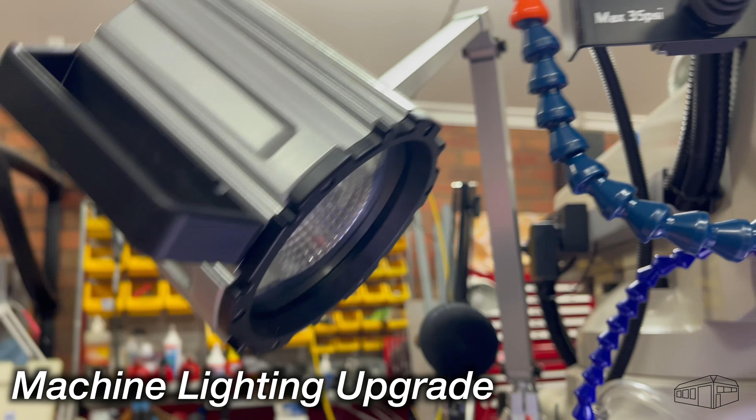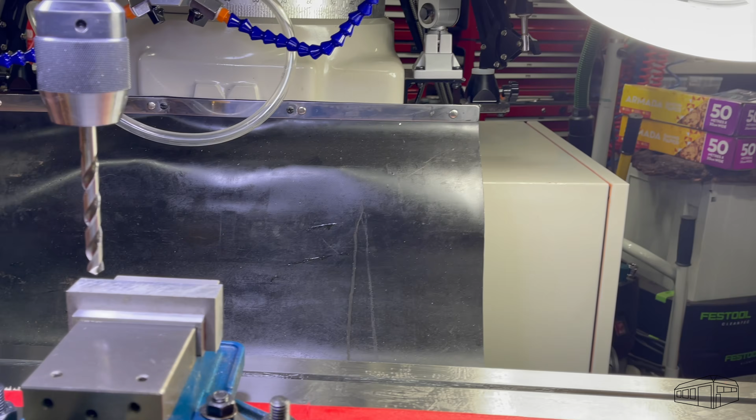My milling machine has a machine light fitted as standard. It's an 11 watt LED and it works very well. I supplemented this with a second light on the other side of the column, and it's also useful as a magnifier for fine work. However, they both create a problem with shadows and flares which restrict the camera placement and angles, so I decided to make an additional light that overcomes these problems. I'll make a ring light that will be mounted around the quill and provide light vertically around the cutter.

I have several requirements for this build. It must not be physically attached to the mill. I don't want to use nuts and bolts to attach it. It must be independent of the mill electrical system. It will be 12 volts, so it won't work with the mill systems anyway. It must be easily removed and replaced for cleaning, or if I don't want to have it fitted for a particular machining setup. It must not be affected by oil or coolant.

It needs to look like it belongs and is part of the machine and not just an add-on. I don't want it to shine light on my eyes during use, so the light must reflect downwards and not sideways. And it must be effective and just work. As a starting point, I had a look on YouTube to see what others have created. While there are some interesting builds, I didn't find any designs I really wanted to use, so I'll make my own. The ring will be 3D printed and I'll use PETG Pro filament.

The parts I will need for this build are an LED light strip in cool white, which will be about 6000K in colour, an inline switch to turn it on and off, a 12 volt power supply of around 2.5 or 3 amps, a power board, some 8mm magnets, and of course some resin.

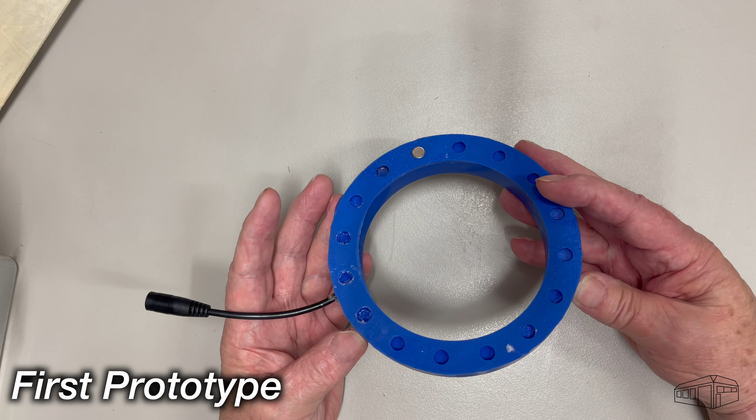I made a prototype to see how the components would fit together, but more to see how the resin would work with the LED strip. I made 2 wraps of strip and that came together alright, but the degree of brightness was not what I was hoping for. However, it does a good job of illuminating itself. It needs to have angled surfaces to reflect the light downwards to the workpiece. A quick sketch and I have an idea to have 2 rows of strip mounted vertically, with each shining against an angled surface to provide downwards illumination.

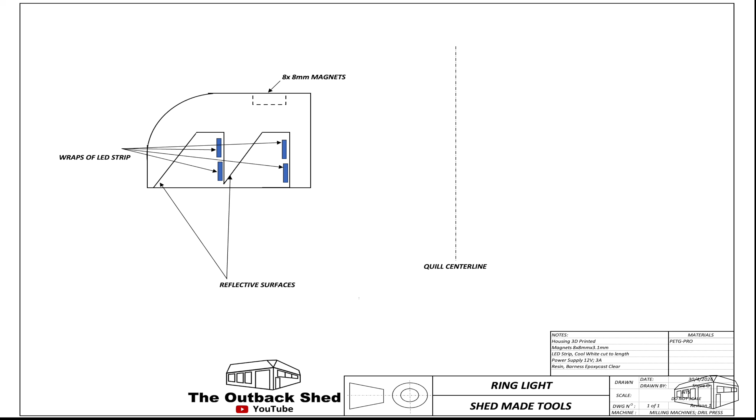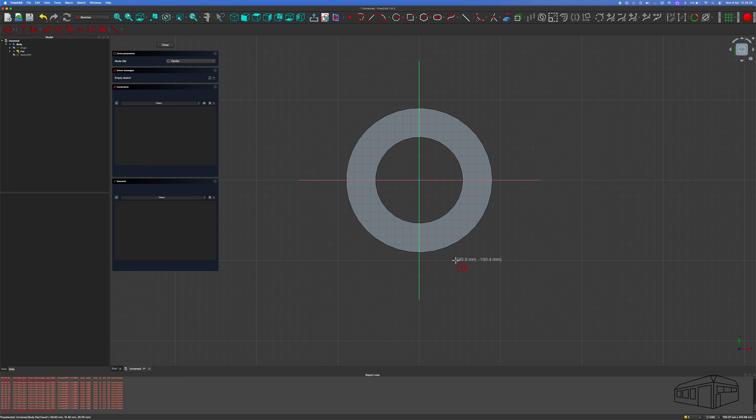As the LED strip is 10mm wide, if I made the mounting surface 25mm, I could accommodate 2 wraps of strip in each row. I'll design the housing using FreeCAD, then I'll 3D print it. As my quill is 105mm in diameter, I'll make the inside dimension 107 to provide some clearance around the quill. The outer diameter will be 180mm and I'll make it 30mm thick, as that works well with the diameter of the head casting and the location of the bottom of the spindle. It will also provide enough space to locate the magnets.

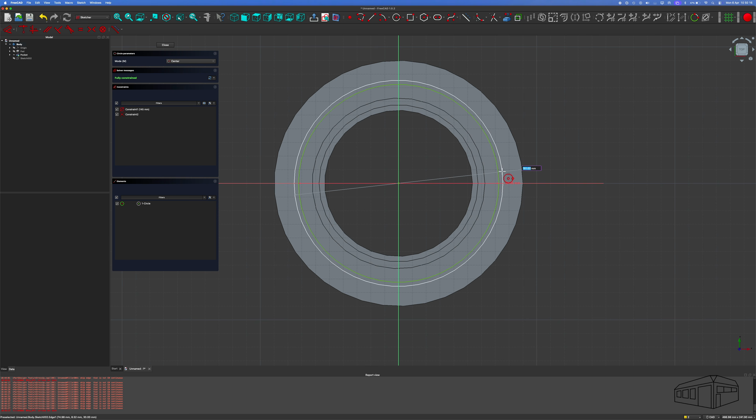I want 2 rows of strips, so I'll make 2 grooves 25mm deep and 5mm wide, one for the inside ramps and the other for the outside ones. Next, I want to drop the height of the middle section by a couple of millimeters so that it will sit underneath the surface of the resin.

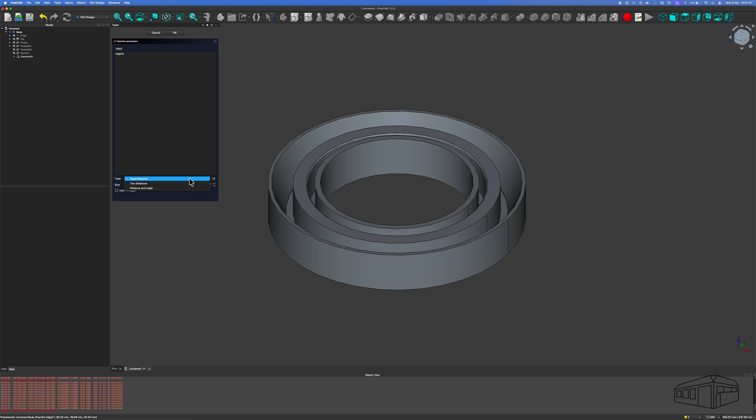Creating the angled reflection surface is simply a matter of putting an unequal chamfer on the corner. I'll do this by eye and just take the chamfer to the bottom level of the groove. The angles are not 45 degrees, but I don't think that'll matter too much. Well, we'll see how the finished light performs. I'll put a 2mm round on the inside edge and a 1.5mm round on the outside edge.

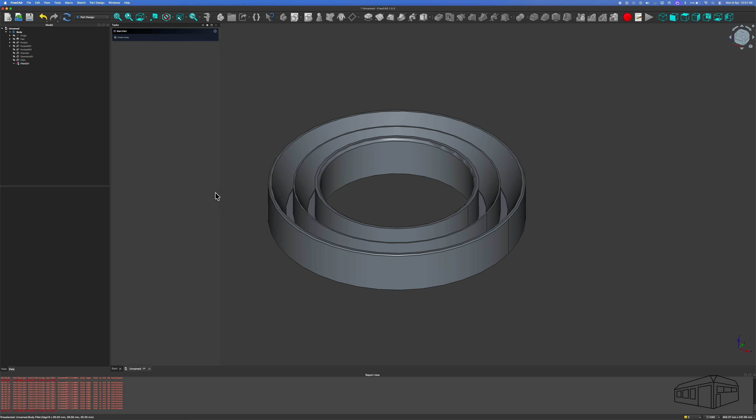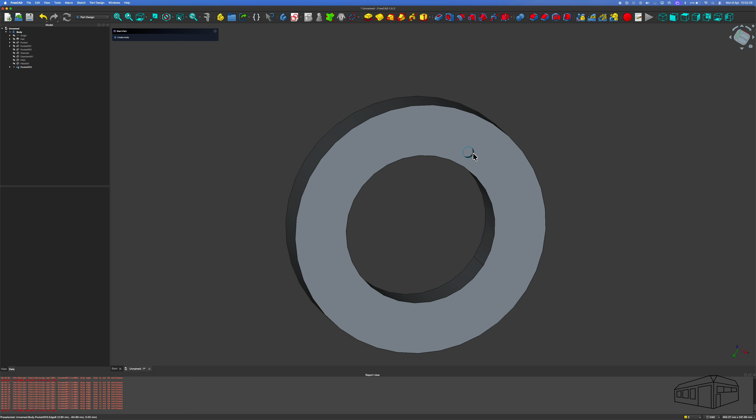Turning the ring over, I'll make a pocket for a magnet. The ones I have are 8mm by 3.2, so I'll make the pockets 8.1 in diameter by 3.3 deep. This will allow for a tight fit and for the magnet to sit slightly proud of the ring, which will make it better for seating on the mill head. It's a simple matter of then creating an array around the ring. I settled on 16 pockets to give me multiple options of the number of magnets I might want to use.

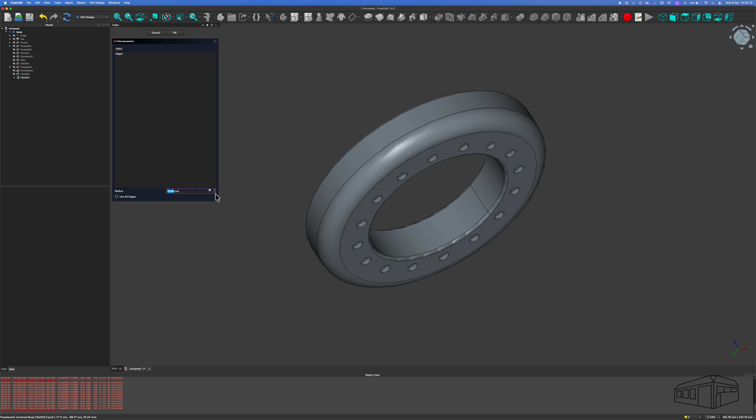A 2mm round on the inside of the top face and a larger round on the outside for aesthetic purposes. I didn't have a number in mind, I just made what I thought looked right. I settled on 14mm. I'll need to cut a channel for the electrical input. I'll drop a 4mm wide groove in the outside of the ring using the pocket tool.

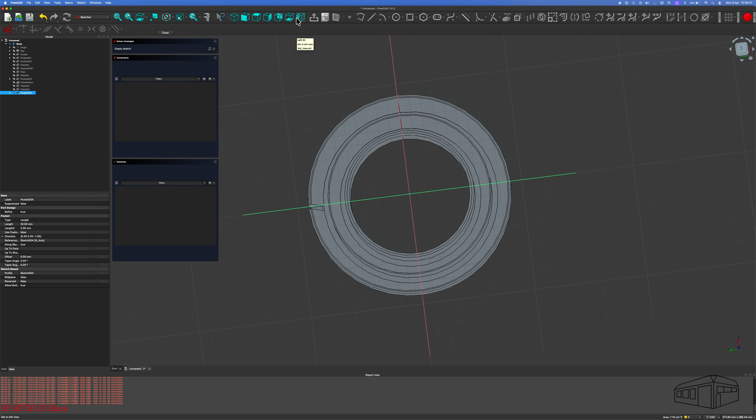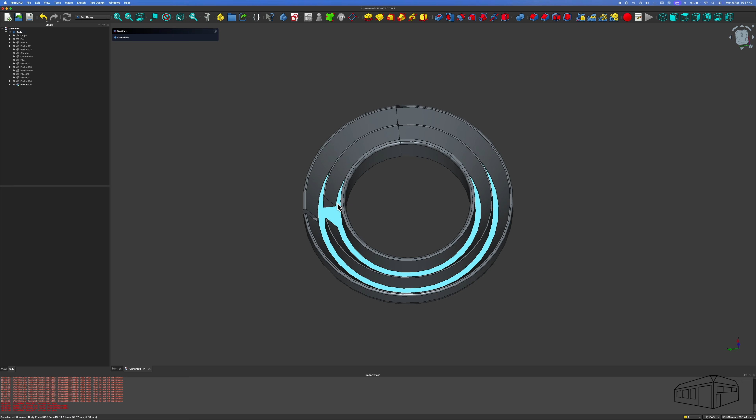Finally, I need to create a gate for the LED strips to cross over from the inside groove to the outside groove. Again, I don't have a specific size in mind, I'll just make it a size that looks right, and I'll pad this to the bottom of the groove. The outside corners will need to be rounded off to allow for a smoother transition of the strip between the grooves.

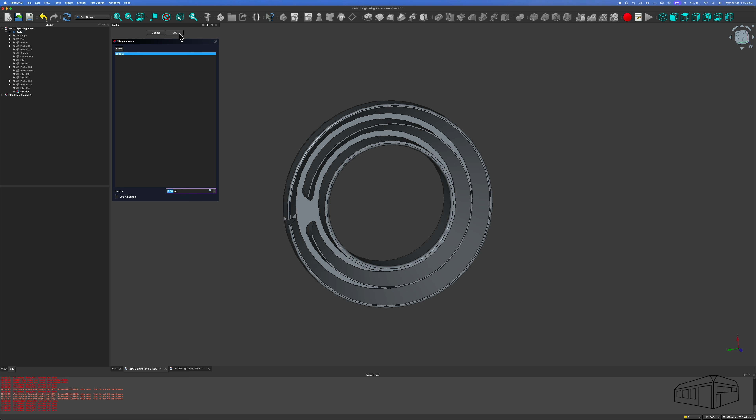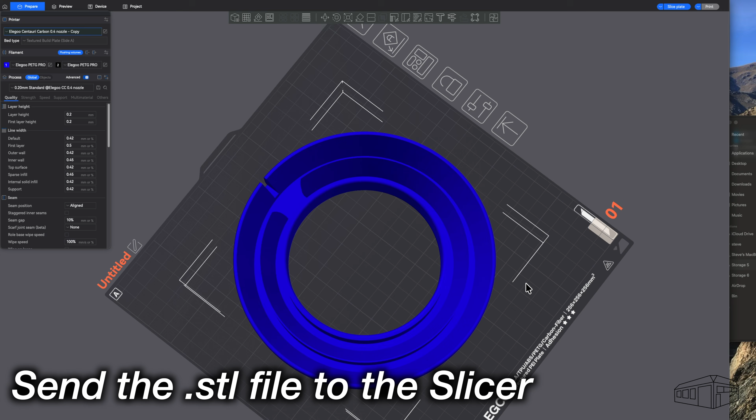That's the design now complete, and I'll save the drawing and export it as both STL and STEP files for printing. I can now drag the STL file onto the build plate in the slicer software. I'm using PETG filament and I'll leave the settings on default. This print should take around 4.5 hours.

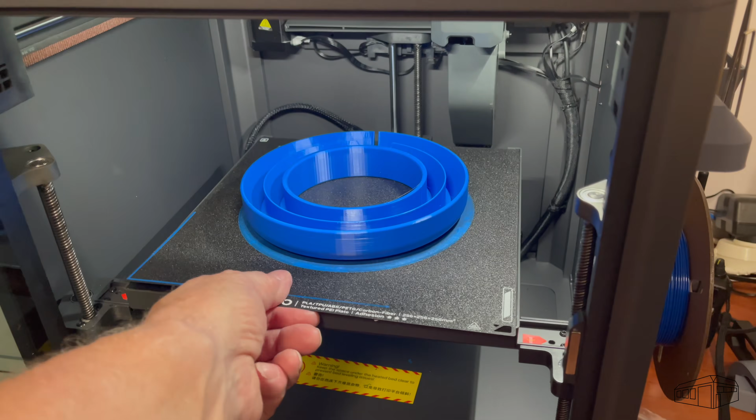I made 2 rings, one blue and the other grey. I'm using white epoxy enamel paint to create reflective surfaces. I applied several light coats to obtain an even finish. However, I'll try keeping the paint off the adhesive surfaces for the LED strips.

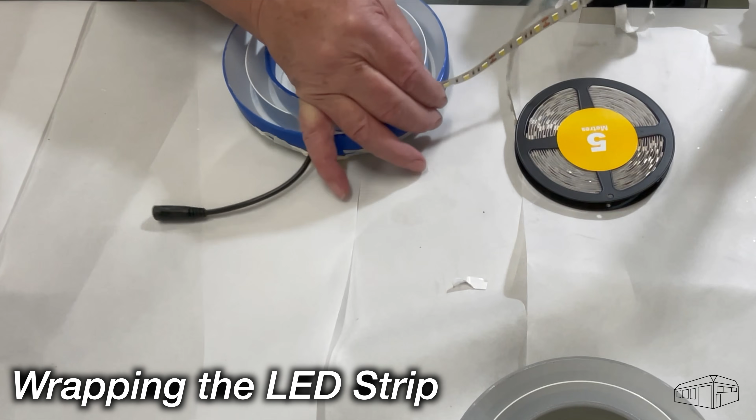The LED strip is metal backed and it doesn't bend or flex easily. It bends around the ring okay, but the transitions from the bottom to the top wraps proved difficult and resulted in parts of the strip having some deformation with a less than perfect adhesion to the ring.

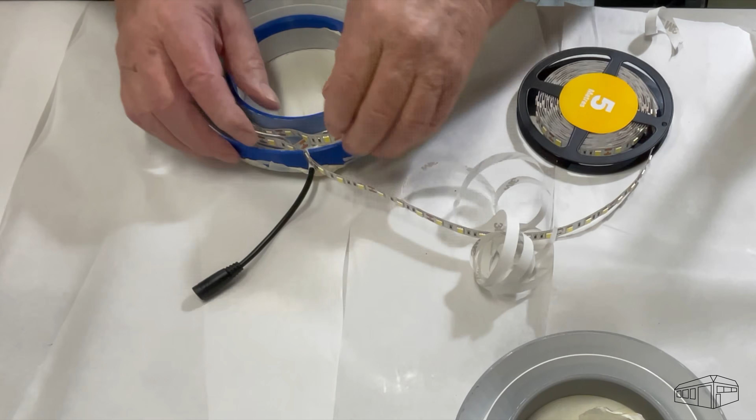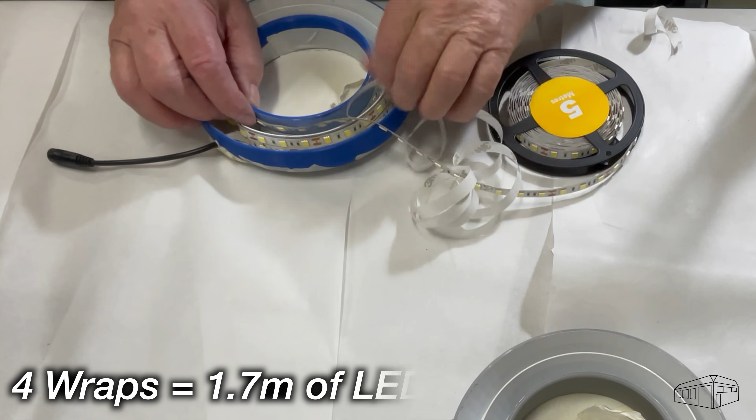The 4 wraps of strip used around 1.7 meters of LED strip, so it should be bright. I'll plug it in to make sure it works before I mix up the resin. It looks very bright. The channel for the wiring needs to be sealed before the resin pour. I'll use a hot glue for this.

The resin is a 2-to-1 mix, and for each ring I'll use 200 grams of resin and 100 grams of hardener. I'll make a separate pour for each ring. This is a relatively small pour, and the best way I've found to mix it is to use a popsicle stick mounted in the battery drill. I'll need to transfer the resin back and forth between containers to ensure that there are not any dead patches.

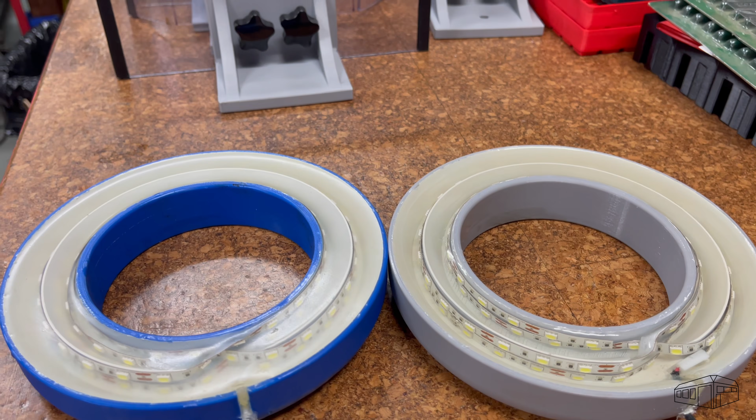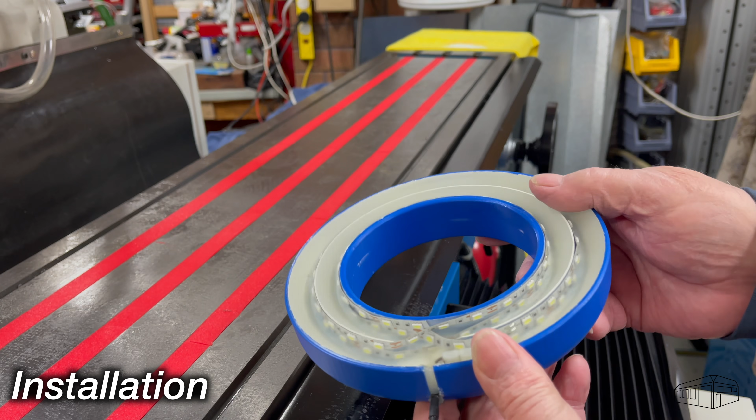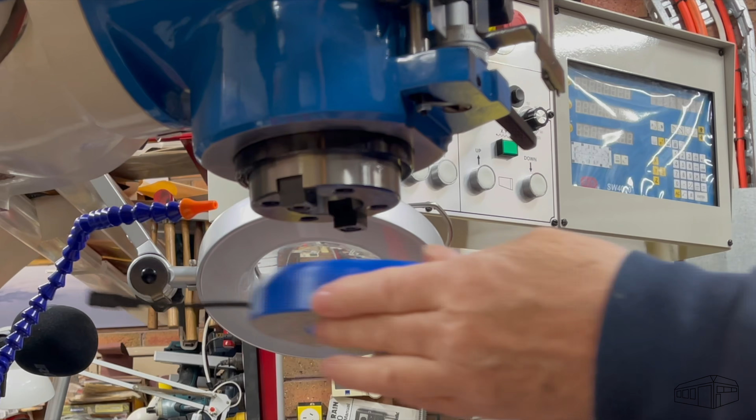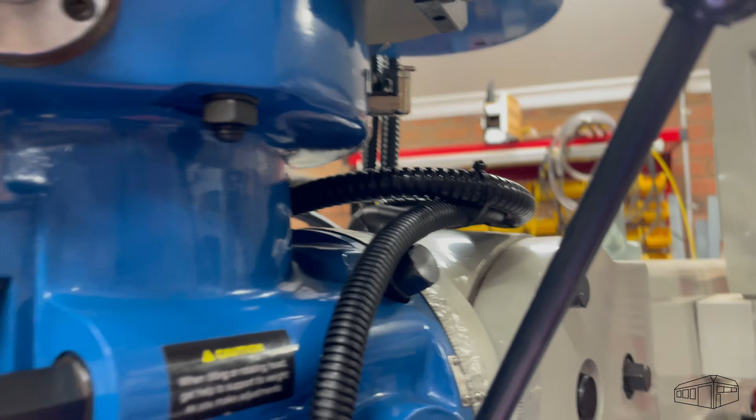Installation is easy. The ring is held to the bottom of the head by the magnets and sits around the quill. The 12-volt electrical connection is just plug and play. I mounted the power board on the cable management track and ran the wire through a piece of loom tube to keep it neat and tidy. The on-off switch is held in place by a piece of sticky back Velcro.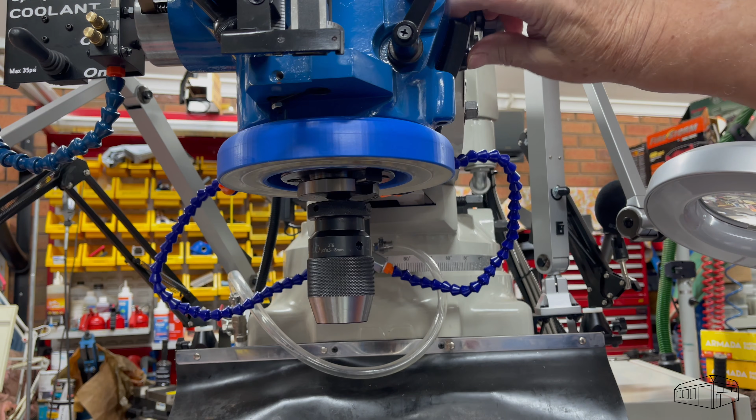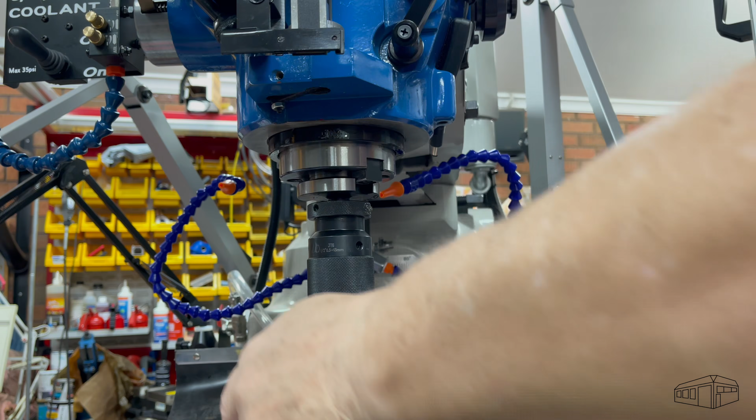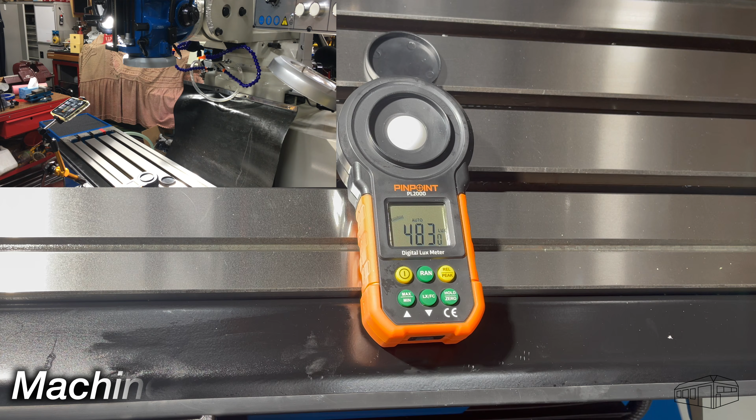Changing the rings is easy. Just unplug, remove, refit and plug it in. I lowered the table to provide an opportunity to compare the output of each of the lights. The ambient light around the mill is 200 lux. Switching on the machine light, the lux meter jumps to 480. The secondary machine light provides up to 900 lux, and it's a softer light as it's fitted with a diffuser.

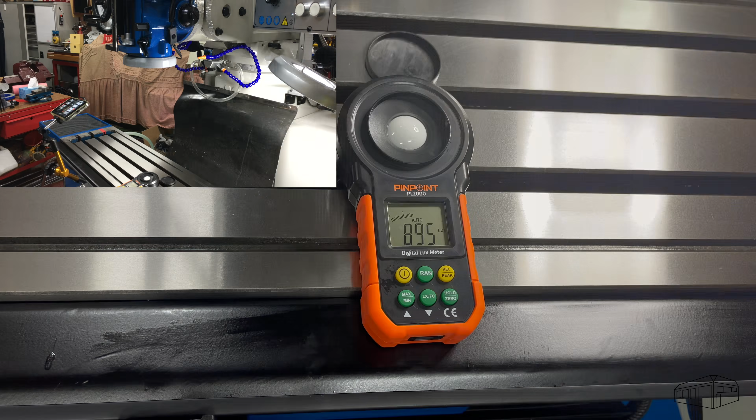The grey non-diffused light produces nearly 1800 lux. Wow, that's bright. That's a lot more than I expected. The blue diffused light provides more than 1300 lux, which is about what I was hoping for from the non-diffused light.

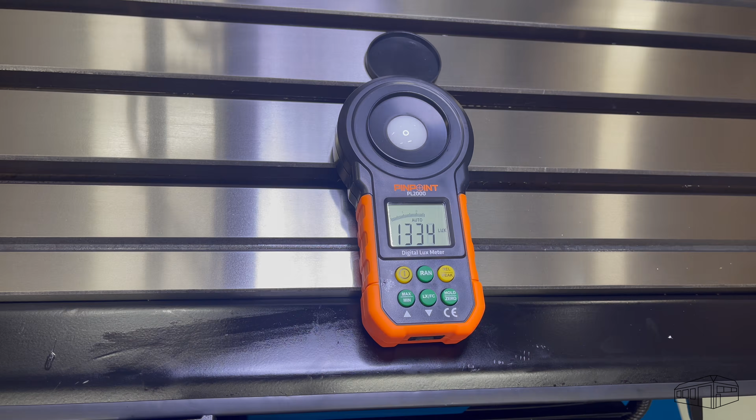I set up a piece of scrap aluminium and I'll drill 3 holes. The first one will be drilled with only the machine light. This shows a large shadow. I drilled a second hole with the machine light and the addition of the secondary light, but the shadow is still present.

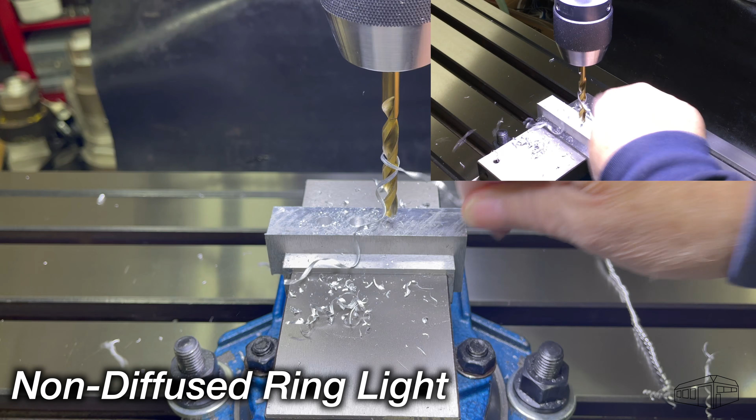The third hole will be lit only by the ring light. It's much brighter and there are not any shadows. That's just great. If I make another ring light, I would possibly use a light strip that is dimmable. That might give more control of the light intensity and allow for some fine tuning during filming.

Well, this has been a very successful project that didn't cost a lot. I'm very pleased with the performance of both of the rings. I'll be setting these lights up on both mills and I'll also design one for the drill press. If you have a mill of your own, this is a must-have addition and it's well worth the time and effort.